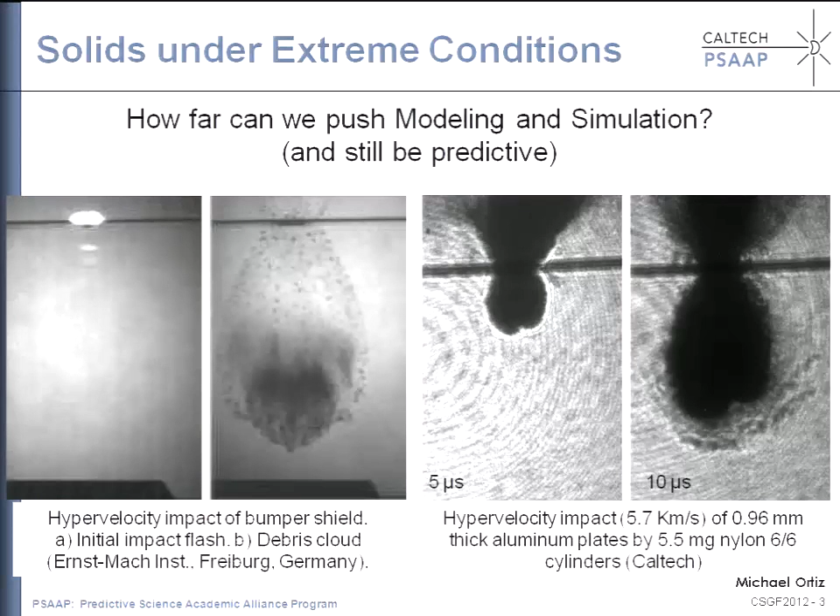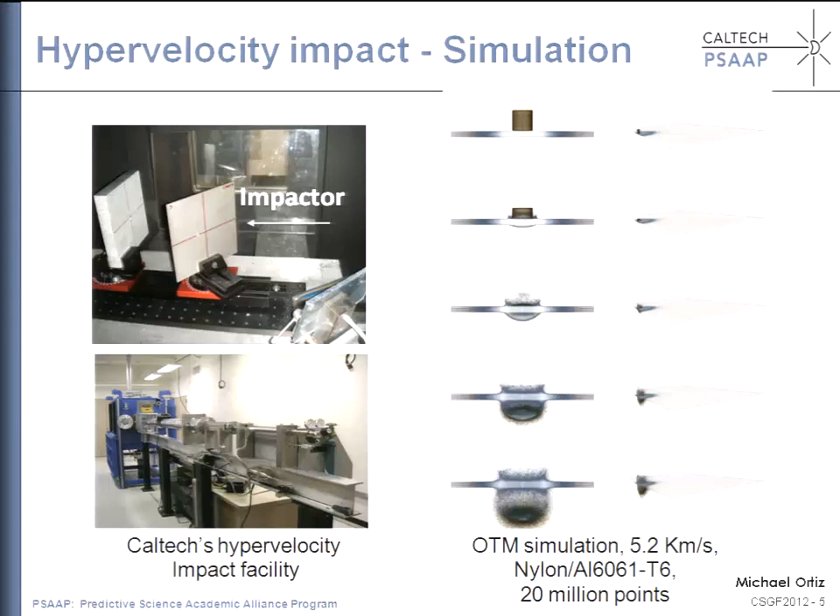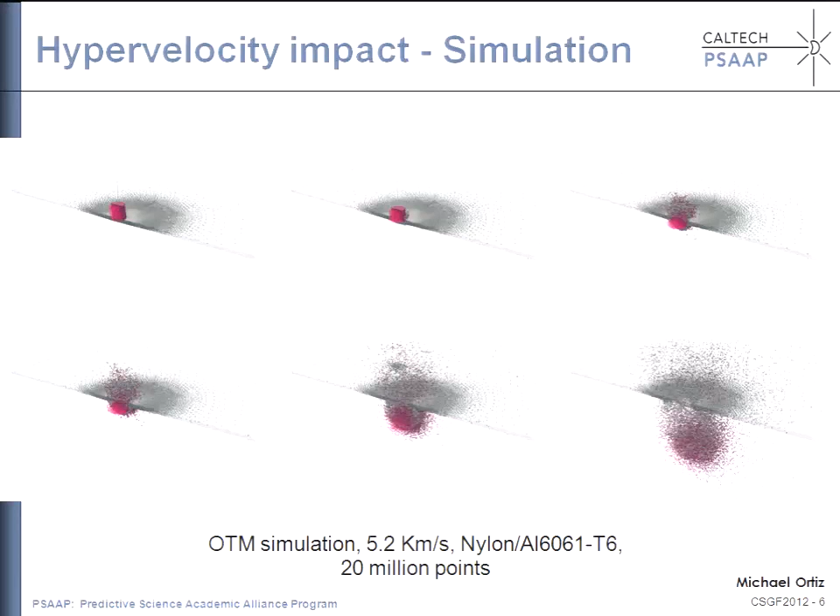Okay, so if we look at the anatomy of one of these simulations, you can see, of course, that a lot goes on. You have impact, you have complex material behavior, very high pressures, very high temperatures, very high strain rates. So the anatomy of a typical computational campaign is as follows. So you can think of it as consisting of several layers. Okay, so at the top layer, what we do is, of course, we don't do just one calculation, but we actually do thousands of calculations. Okay, what we call ensembles of calculations. And the objective is to garner statistics.

So the systems we are simulating are to some extent random. They can have random inputs, or they can become chaotic, for instance, fracture and fragmentation. Okay, and then the question is how well can you pin down the behavior of the system and what is the level of uncertainty in your predictions. And for that, it's not enough just to send one calculation, but you have to do literally thousands of them, actually statistical sampling. And at this level, the purpose of the uncertainty quantification campaign, as it's called, is to, as I was saying, garner statistics and determine design margins and also levels of uncertainty. Okay, so that's very typical of the way we conduct calculations these days.

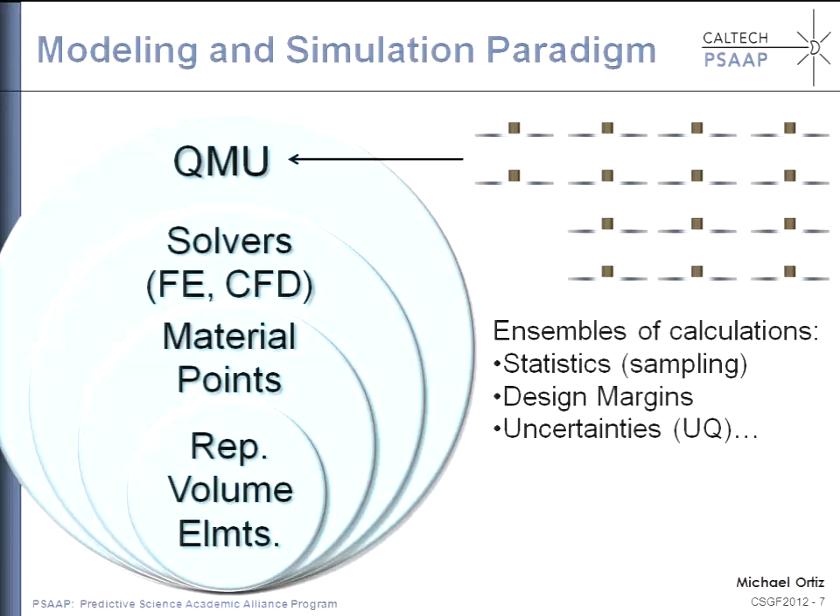It's not just doing one hero calculation, but actually literally doing thousands of them, and quantifying uncertainties. At the next level, you peel off the QMU layer, and you're looking at doing individual calculations. So here's where you have to contend with the global geometry of the system you're simulating, maybe a CAD model.

You have to worry about boundary conditions, initial conditions, for instance, impact velocity of the impactor, the thickness of the plate. So these are all things that are passed into the solver, and the solvers are supposed to bundle all this information and move it forward in time. So this layer, the layer of the solvers, of course, is very sensitive to the details of the simulation, to the geometry, to the boundary conditions, to the initial conditions.

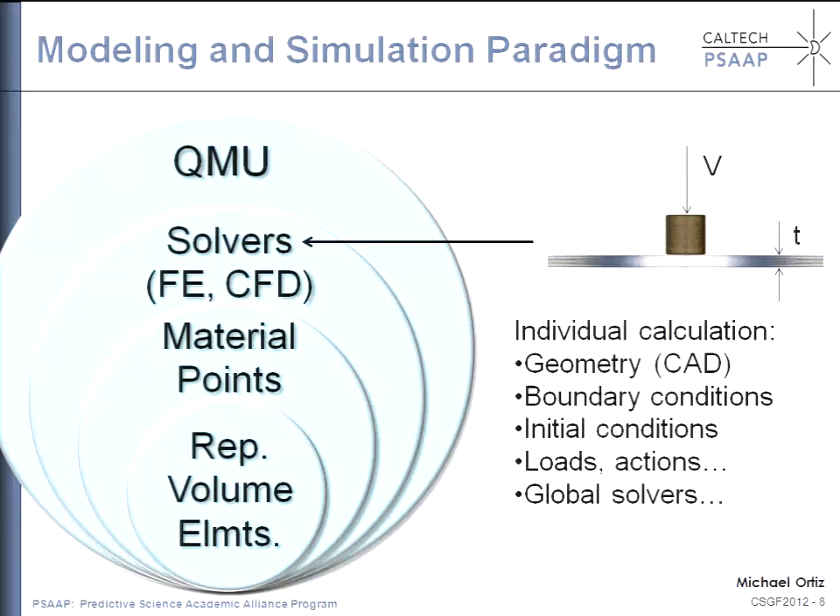However, if you move down one level, then you're looking at individual material points, and these represent local material elements. So these are small bits of material that only see local conditions of deformation and temperature, and they're completely insulated from the geometry of the system. So once you come down to the level of an individual material point, you have lost sight of the particular geometry that you're simulating, you've lost sight of the particular boundary conditions, and you're looking specifically at material behavior, the behavior of small samples of material.

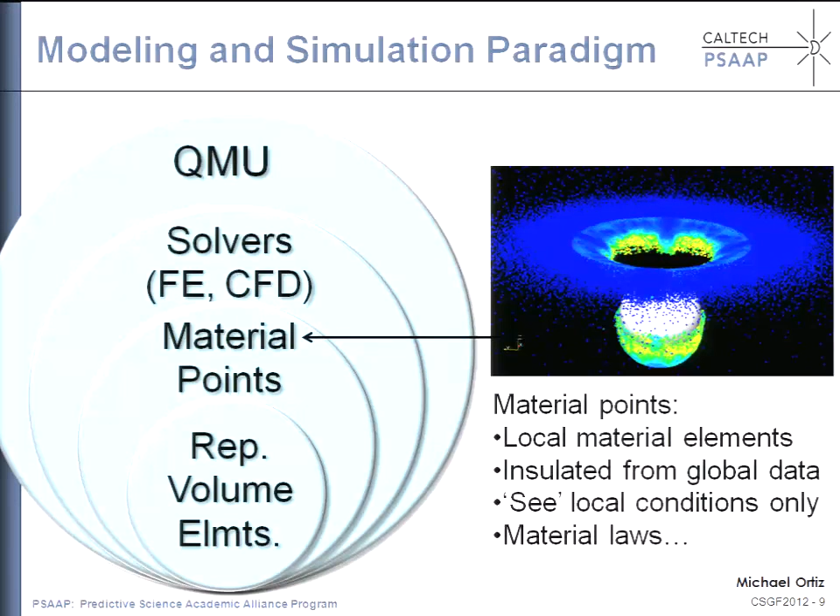And that behavior is driven by local conditions and takes the form of material laws, constitutive laws, what have you. And if you keep looking down in length scales, you find that material points are not just blobs, but they have a lot of structure themselves. So you start looking under the microscope, perhaps, and you see that an individual material point is not at all a point, but may have a polycrystalline structure. So it really represents what is known as a representative volume.

If you keep looking down, maybe in each one of the crystals you begin to see individual defects, such as dislocations. You keep looking down, you start seeing individual atoms, and now you're at the level of quantum mechanics. So it is this hierarchical point of view that perhaps describes best the anatomy of a modern computational campaign. And what I would like to focus on today is the description of the material at this level. No matter what you do, the flow of information of a typical calculation will always take you at some point to the level of individual material points. And there the question is, can you describe that behavior?

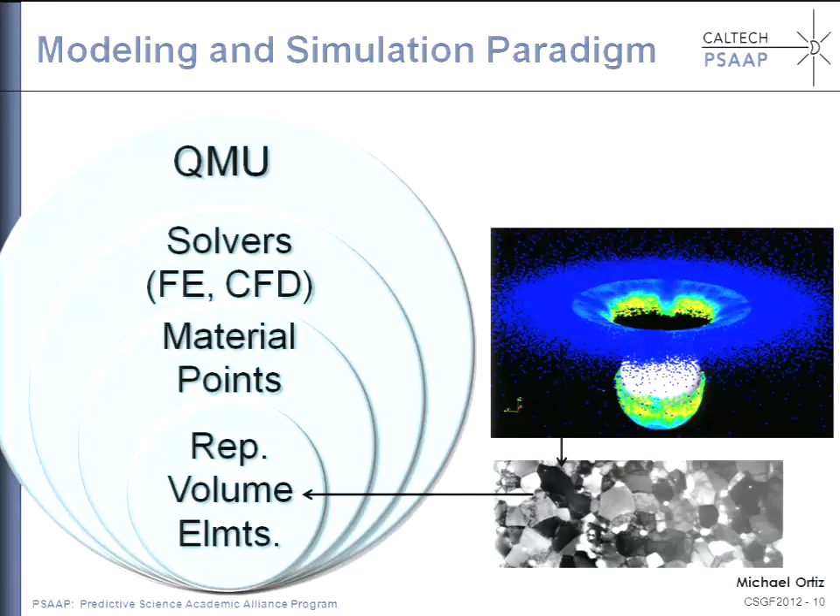So that sets the boundary conditions. And so this is a summary more or less of what I said. The material points, material models really sit at the core of full system simulation. The flow will always take you to a material point, and you'll have at some point the need to describe the behavior of those material points. And that behavior is purely physics or chemistry. So at this point, you're completely insulated from the details of the global geometry, boundary conditions, and so on, and you're just facing physics-based modeling.

The other thing to be pointed out here is that, because material models really are the core of the simulations, they're really predictive bottlenecks. No matter how good a job you do at spatial resolution, at temporal resolution, you can refine the resolution of your global system as much as you want. If your material description is no good, your global simulation will also be no good. So your simulations are only as good as your material models and never better. You really need to give them a lot of attention, make them really predictive if you want to have any chance at being globally predictive.

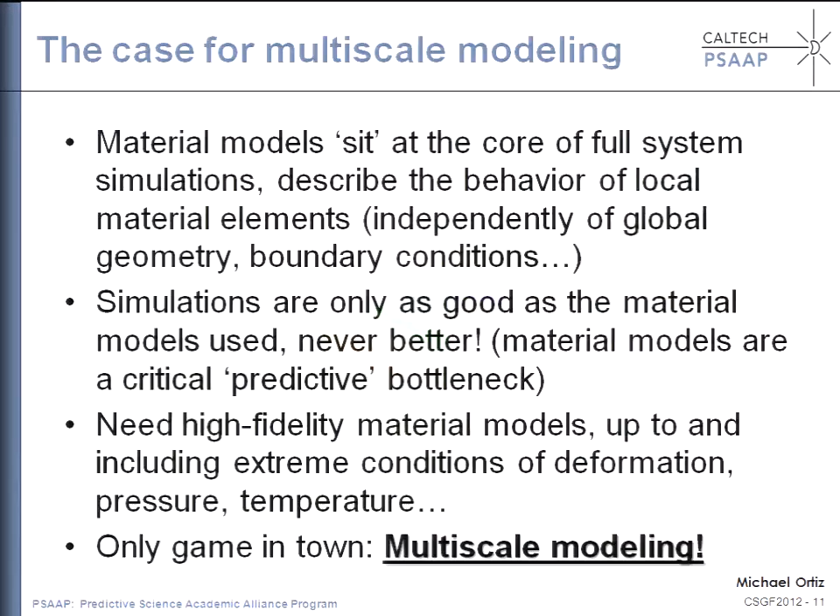And the physics is multiscale. So really the only game in town in terms of developing high fidelity material models is multiscale modeling. So what is involved in multiscale modeling? As I was saying, the reason that you need multiscale modeling is the physics of materials is really multiscale.

Say, for instance, you're trying to characterize the strength of materials. How do materials deform at high levels of stress and temperature and strain rate, for instance? Your global simulation may be at this level, so now you start looking down length scales and time scales. In a typical metal, you begin to see the polycrystalline structure. So you see that these material points are not points at all, but themselves have quite a bit of structure.

The first level you encounter at the SEM level, you begin to see the polycrystalline structure. Then if you look within individual grains, you find that the behavior of each one of these grains is far from being homogeneous. Typically you develop very fine subgrain structures that I'll come back to in a second. Then if you keep looking down in the length scales and time scales, you begin to see individual defects, so dislocations, vacancies, and so on.

Of course these are mediated very directly by the atomistic structure of the material, but still are at a continuum length scale. So maybe the scale of microns or hundreds of nanometers are still within the purview of continuum models. And then if you look at individual defects, here you see the atomistic structure of matter, and you may see the core structure of each one of these dislocations, which, as you know, are line defects in crystals.

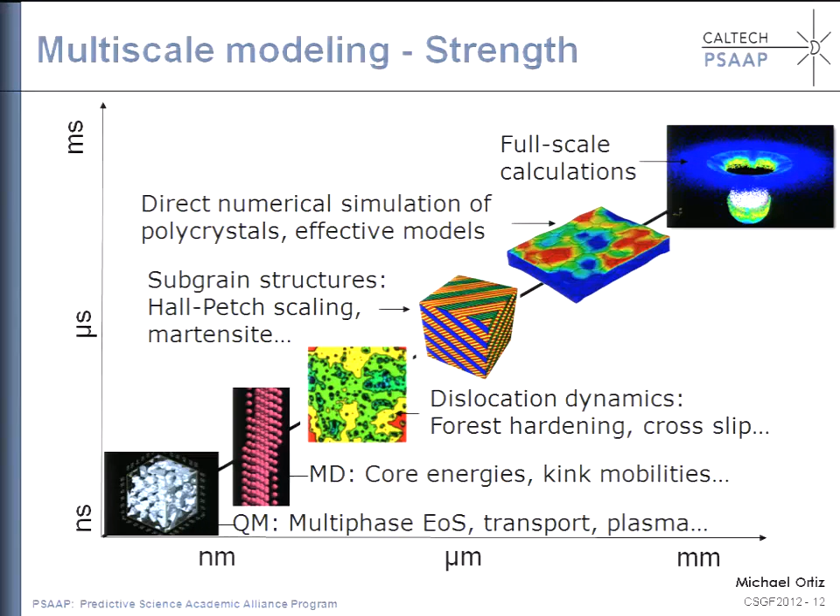So what is the big deal? Why don't we just go ahead and do it? Of course, multiscale modeling is much more easily said than done. So the question is, how do you actually do it in practice in a way that you can use the models in actual calculations, with some actual computational capability?

The essential difficulty is that there are many vastly disparate scales. You start at the atomistic level with quantum mechanics, and between that and your engineering application there could be maybe 10 orders of magnitude in length scales and also in time scales. So quantum mechanics will never do. There's a lot that happens between quantum mechanics and your engineering applications that determines the macroscopic behavior of materials, and somehow has to be modeled in some systematic way.

Whereas there are some processes that happen at the atomistic level, they're rate limiting: lattice defects, transport, and so on. The macroscopic processes of interest, maybe ductile fracture or irradiation damage or aging of materials, may happen at length scales that are completely macroscopic. And there's a huge gap in between.

Also in terms of time scales, if you're doing a molecular dynamics calculation, a typical time scale will be maybe a femtosecond. You may be interested in aging of materials. That happens over years. So again, a huge gap in time scales that you have to fill in if you want to model aging in a multiscale fashion. Also the spatial scale gap: you have to go from angstroms to maybe millimeters and meters.

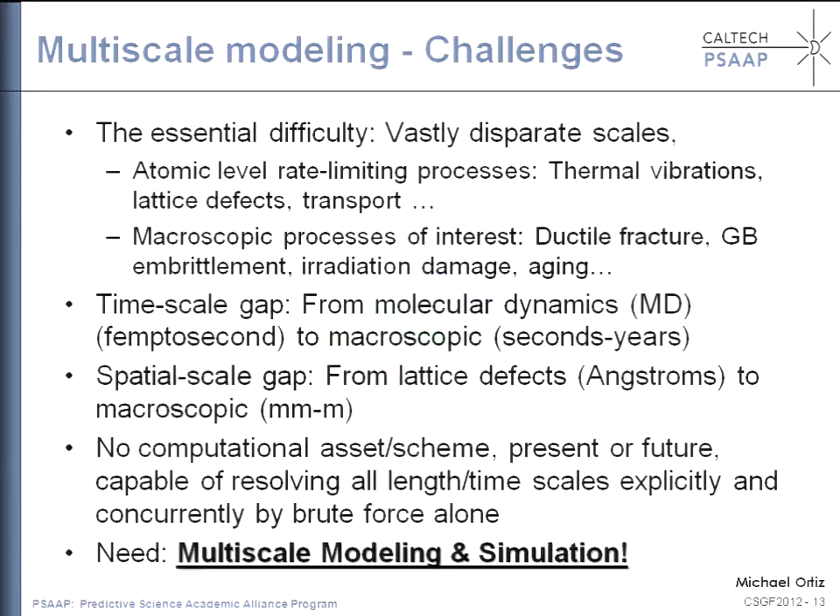But as it turns out, there is still room and a need for being clever, and the cleverness really comes in multiscale modeling and simulations. How do we actually do it, provided that we cannot just do it by brute force? So now I'm going to fill in some details as to how you can actually bridge length scales in a practical way, so that at the end of the day you have models of effective behavior that you can actually use in simulations.

So say you're Galileo Galilei and you're pondering the cutting edge question of the time, which is how do you model beam bending. Most beams at the time were made of wood. And of course, it's clear that wood has a lot of microstructure, so it's composed of cells. The cells maybe could be in the millimeter scale or sub-millimeter scale, whereas a typical beam could be several meters in length or in span. So clearly you have a multi-scale problem here.

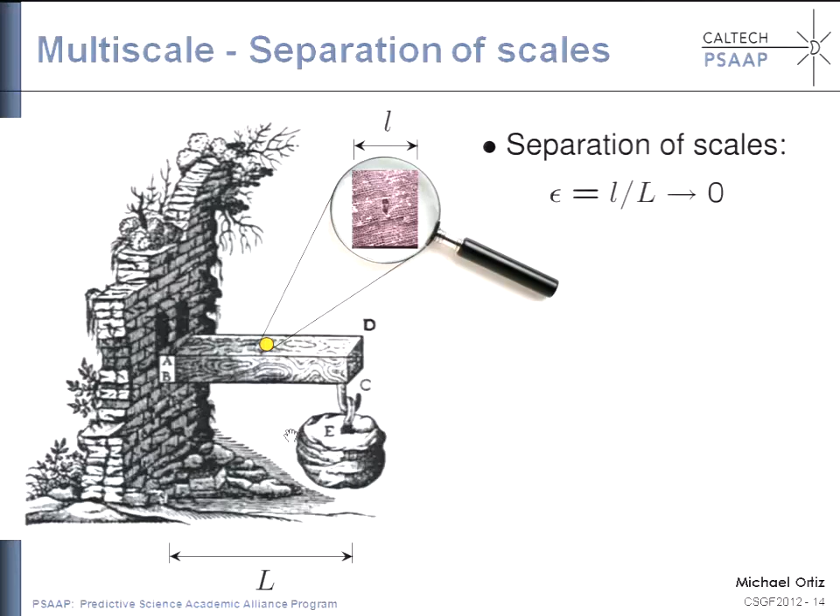So if you're Galileo Galilei, what do you do? You say, well, okay, fine. This is a multi-scale problem, but there is strict separation of scales. The length scale that I'm interested in is much, much larger than the length scale of the microstructure. So it turns out that under these conditions, if you have strict separation of scales, then you can do clever things.

And of course, very often you're interested in the engineering application, so you want to know just what is the macroscopic behavior of your system, and you don't really care so much what happens at the individual cell level. You may have millions and millions of cells. You don't really care so much what happens in cell 500,002. You really are interested in the macroscopic behavior. So some way we would like to get rid of the microscale and come up with an effective model that we can use in simulations where the microscale has already been eliminated and it's taken into account in some effective way.

However, you may still wish to have a return option. So what does that mean? Very often you're not just interested in macroscopic averages, but you may be interested also in knowing what happens at the microscale, so also at the individual cell. For instance, suppose that you're interested in the failure of the beam. We know that that would be mediated by processes that happen at individual cells, cell crushing, cell shearing, things like that. So in some conditions, you may wish this return option.

So you want to have an effective theory that allows you to go back if you need to and query the conditions that happen at the microscale. Those may be important especially if you're interested not just in average behavior, but in the extremes of the fields, because maybe those are the ones that are important for failure processes or some other processes. And I'll show you an example later on where this return option is really important. So this is the objective.

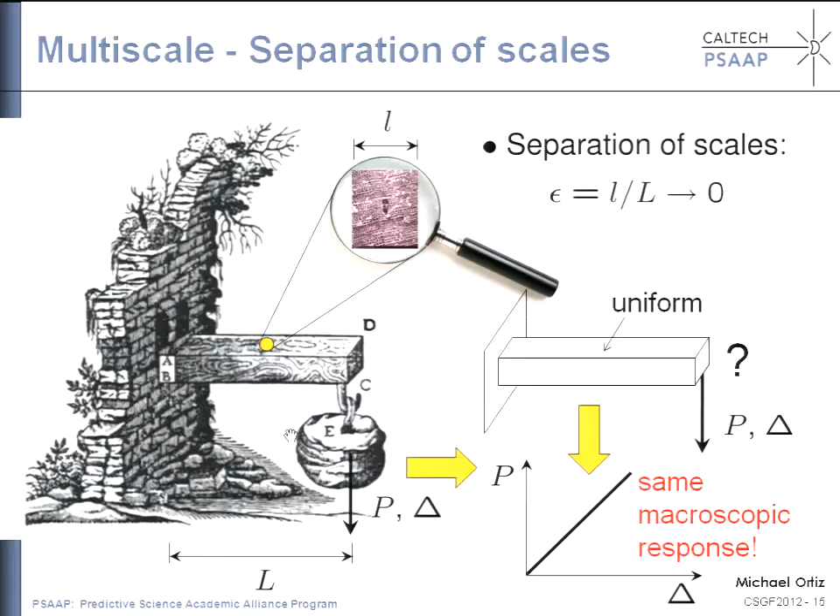There are many cases where the microstructure happens as a result of deformation. So initially, the material is uniform. You deform it somehow, and in response to that deformation, the material develops microstructures. In this case, of course, it's a bit more difficult because you don't know to begin with what the microstructure is. You have to predict what the microstructure is, okay?

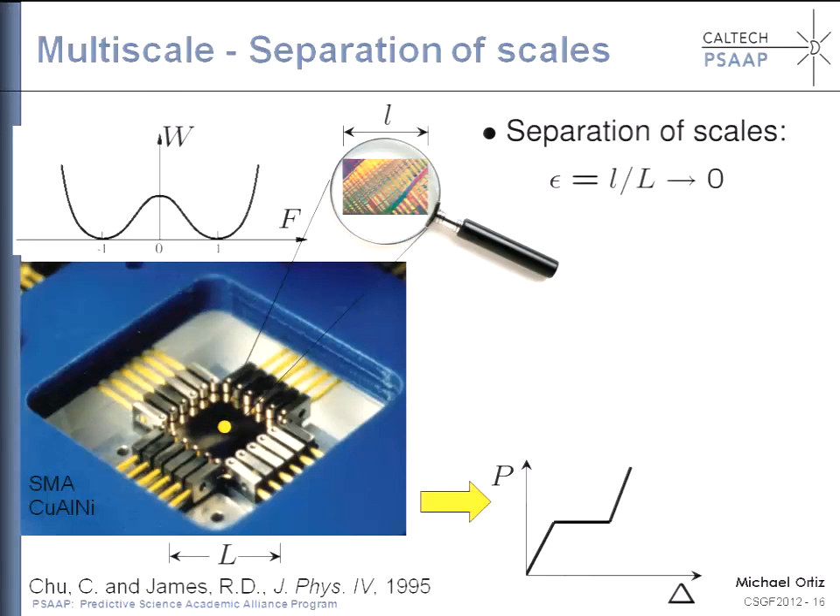And in this case, the objective would be to develop an effective model that you can use at the macroscale that somehow has eliminated, again, the microstructure, but that gives you a macroscopic response that is indistinguishable from the original system. And these kind of situations perhaps are more generic in the sense that you don't know what the microstructure is beforehand. It's part of your prediction.

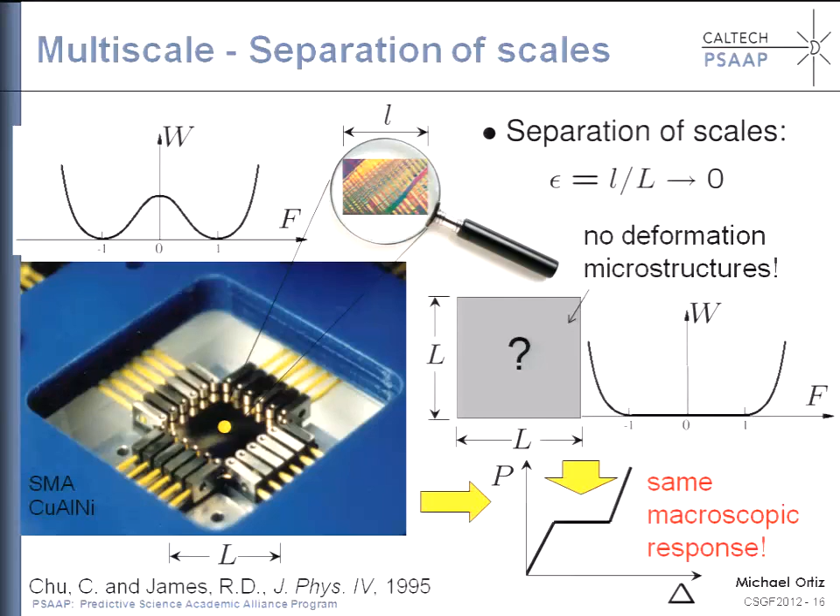Okay, so fine, but how do you do it? Of course there are many methods that have been developed, some of them going back to the 19th century. Statistical mechanics was really intended to be a multiscale method, where you go from thermal vibrations to macroscopic equations of state. So there are many methods for bridging length scales. Some of them are better than others. So let me give you an example just to convey the flavor.

There are some situations where the behavior of materials is governed by energy minimization. Basically, there is some energy functional, and the material will develop microstructure in such a way as to minimize its energy. In this case, there is a standard theory called the calculus of variations that provides a recipe, basically a crank that you have to turn, that at the end of the day will give you the effective behavior of the material. And physically or intuitively, the scheme is very clear.

You may have a macroscopic application. I've chosen one at random, say deep drawing here of a cup. At this level you want to have an effective description of the material. You don't want to contend with microstructure. What you have to do is consider what are known as representative volumes, so small volumes of material. And within each one of these representative volumes, somehow you have to pre-evaluate all the possible microstructures that will occur.

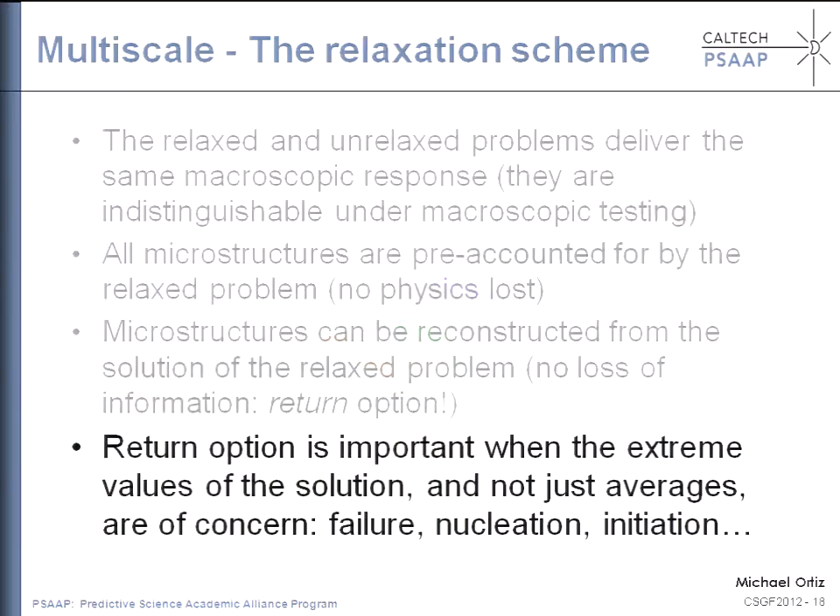As I was saying, this return option is important when the extreme values of the solution and not just averages are of some concern, because of failure, because you're interested in nucleation, initiation, or some other reason. Okay. So let me give you an example where this kind of scheme actually is essential in the sense that, as far as I know at least, there would be no way of doing these kinds of simulations without multiscale modeling of this particular type.

The particular application concerns the detonation of high explosives. In particular, what one wishes to understand is initiation sensitivity. So what is initiation sensitive to? The standard picture there is that, again, this is a multiscale problem in the sense that these HE materials have a grain structure, and then molecular dynamics simulations and also direct observation show that at the subgrain level, the material develops microstructure. When you look at individual grains, you find that the deformation is far from uniform, but it can localize along very narrow shear bands.

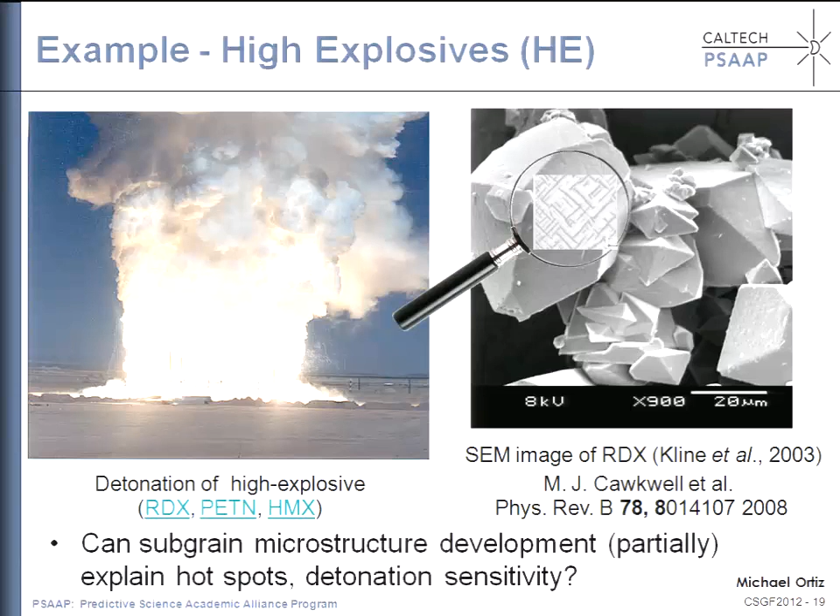Those shear bands actually deform much more than the average deformation of the material. You develop very high pressures there, very high temperatures, so you have hot spots. And initiation, of course, is all about developing hot spots. It's no longer just about average conditions in the grain, but the extremes of the distribution. So here's how we do these kinds of calculations in a multiscale fashion. This is the flow of information, and you can think of this as an information boomerang, okay? Again, it's not just upscaling, but upscaling followed by downscaling.

You start from some basic material properties that perhaps you compute using atomistic simulation or even quantum mechanical simulations. Here, these materials are molecular crystals. There is rather little information about the behavior of these materials, for instance, the plasticity of these materials, the strength of these materials. So we filled in those gaps doing ab initio first principles calculations. When I say we, I really mean my colleague Bill Goddard and his group. There are a number of basic properties that we computed this way, and we used them to populate the single crystal plasticity model that operates at the single crystal level.

This is supposed to be a material point, a representative material volume, that in a macroscopic simulation would sit somewhere within the mesh. And these are the typical microstructures, the optimal microstructures that give you the effective behavior of the material. These are called sequential laminates. You can show mathematically that it is precisely these microstructures that give the softest possible response of the material. So these are the optimal microstructures. And we can generate them analytically in closed form, and we can get the effective behavior analytically in closed form. That's great news. Anytime you can avoid doing calculations, that's great, because having solutions analytically in closed form really saves you huge amounts of calculation.

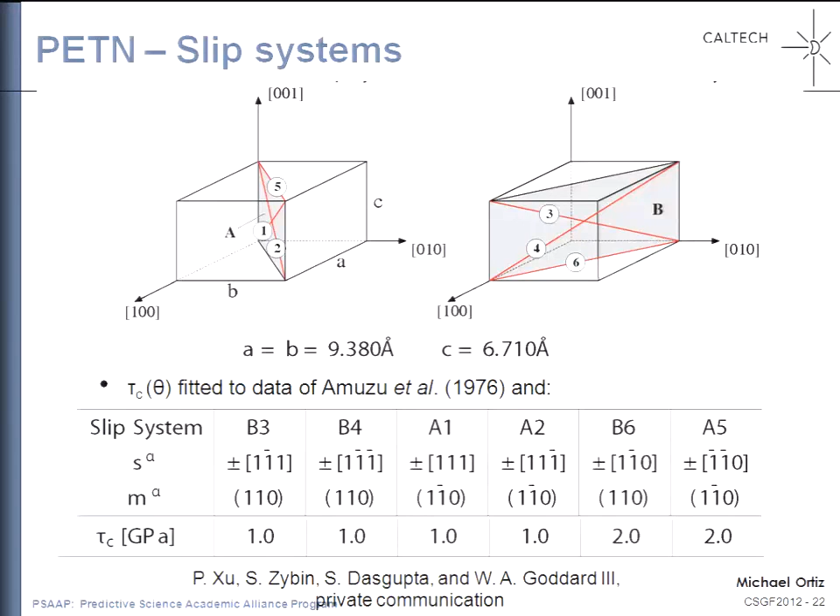As we were saying, there is very little that is known about these molecular crystals, for instance, PETN. What are the active slip systems? What are the yield stresses for the activation of plasticity? Those are, for the most part, unknown, and were computed from quantum mechanical simulations. At that point, we are in a position where we have a baseline model at this level. We can unleash the microstructural calculations and then compute effective behavior and use it at this level.

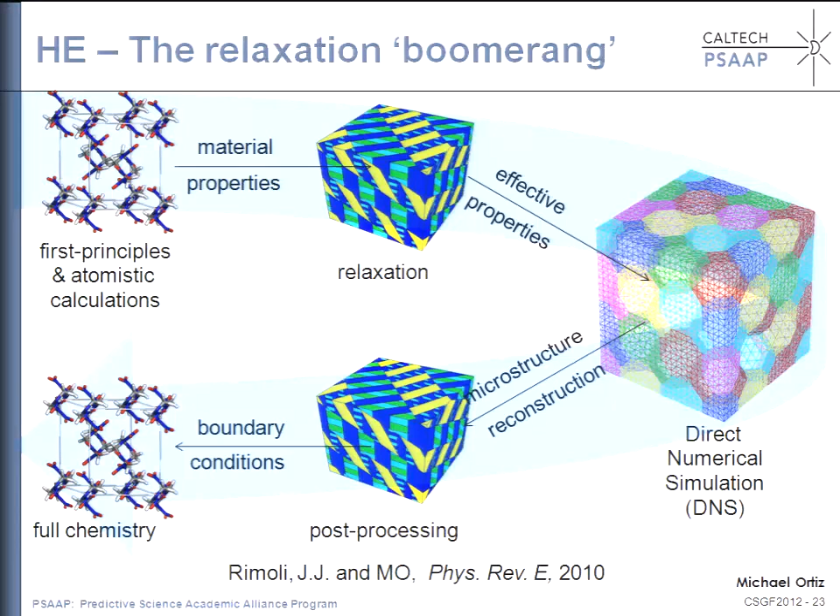So then we can go back at the post-processing stage, generate microstructures of interest, and then pass boundary conditions to our colleagues. Typically, the microstructures that you find are microstructures where you have extreme concentration of deformation at some points. So these are the hot spots. It turns out that the time scales in the development of these hot spots are of a microsecond.

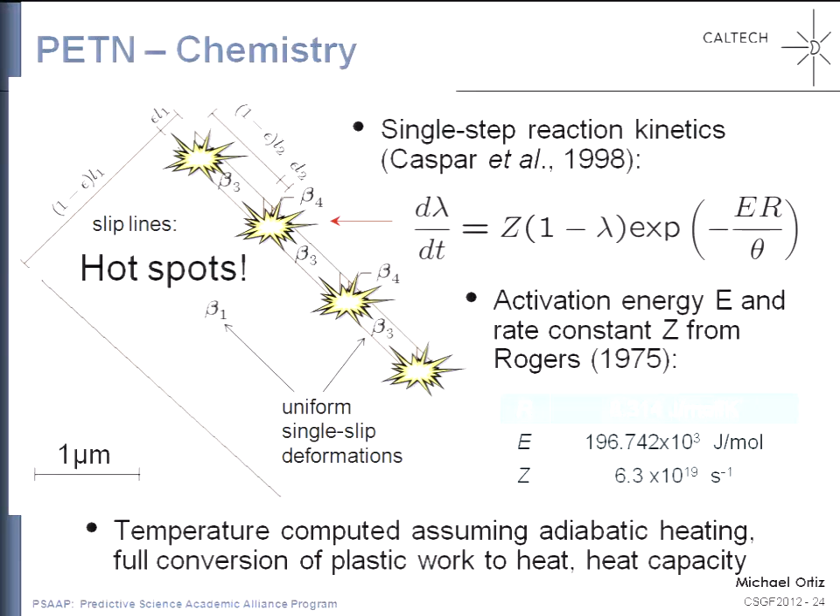So if you go to somebody like Bill Goddard and say, please do a quantum mechanical calculation over a time span of microseconds, he'll say it's absolutely impossible. So just to demonstrate the connection with chemistry, we used a very simple single-step reaction kinetics as a placeholder to full-scale quantum mechanical chemistry calculations. And so then we tried to make contact with engineering testing.

So very often these materials are tested in a plate impact configuration. So you have a plate of PETN, and you have a flyer plate that is sent against the specimen maybe at 1,000 meters per second. So that induces a shock that goes through the thickness of the plate, and in some cases induces detonation or initiation. In some cases, it does not. So of course, the predictive challenge here is to determine when you have initiation and when you don't.

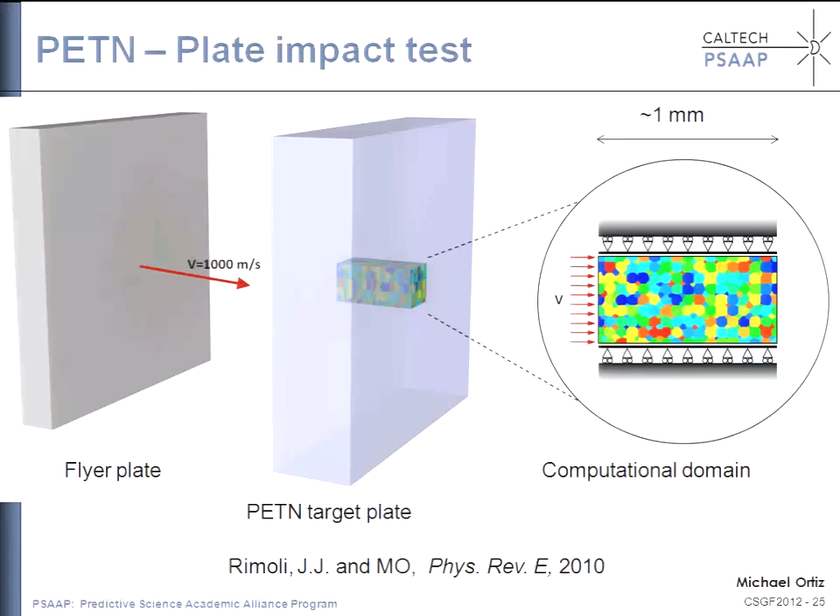And so the way we do the simulations in this case is we just take a core of material through the thickness, and we apply periodic boundary conditions around the perimeter of the core, and then this would be the computational domain. So it turns out that these days we have enough computational power that you can resolve the polycrystalline structure of the material explicitly. So here's where you can use brute force.

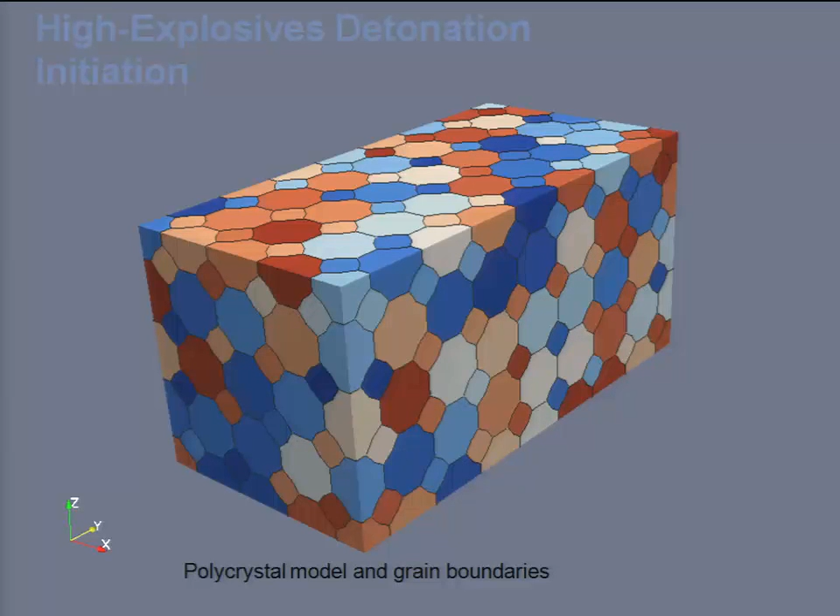In the old days, there were people that spent entire careers trying to characterize the effective behavior of polycrystals. So these days, at least this is a case where we don't have to be clever. We have enough computational power that we can actually resolve explicitly the polycrystalline structure, and we do. So this is a typical mesh that we would do in the calculations. So this is a typical simulation.

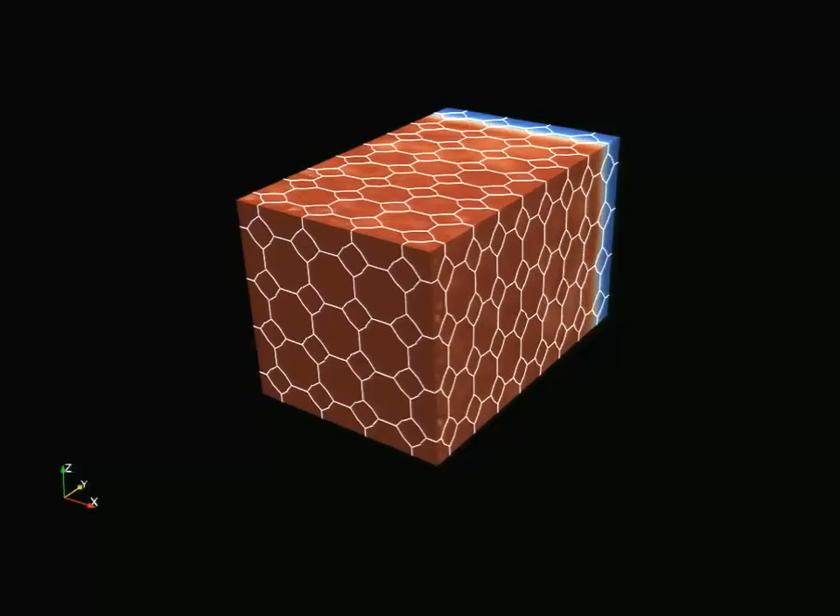So what you're seeing here is the effective model being exercised. What this effective model is giving you are average conditions. Not peaks, but average conditions. So you see some fluctuations here in velocity in this case, and those fluctuations are due to the polycrystalline structure. So there are some fluctuations, but definitely not hot spots, something you could call hot spot and could be responsible for initiation. So again, this is a map of temperature. You see some fluctuations, but again, very mild fluctuations just due to the polycrystalline structure.

And what I'm showing here is that I've taken two material points at random, and I'm showing the evolution of the microstructure, predicted by the microstructure model, at each one of those material points. Of course, there are thousands or perhaps millions of these material points, and this is just a sampler. And what you see is that at individual material points, you develop very fine microstructures, where there are regions that are very highly deformed, that attain very high temperatures and conditions that are, in fact, highly in excess of the macroscopic averages.

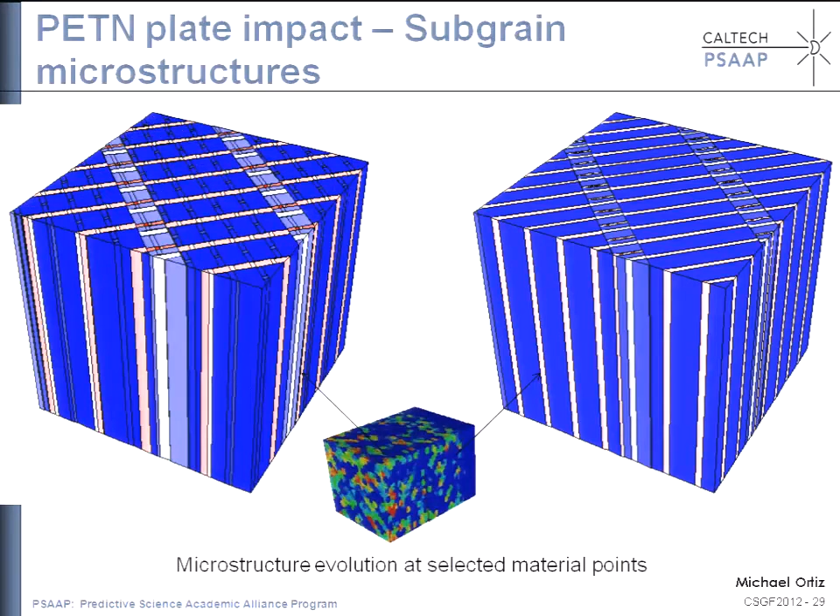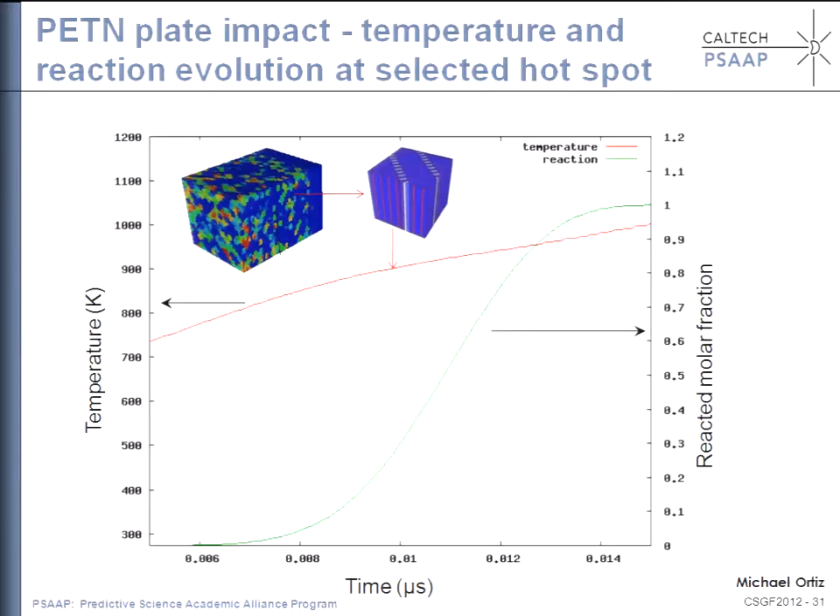So whereas the macroscopic average doesn't really give you any useful information regarding hotspots, the microstructural model gives you at least some handle or some information about extreme values in the distribution of pressure, deformation, and temperature, and then you collect some hot spot statistics, which is what I'm showing here. So this is the evolution of a typical hotspot, how the temperature rises. This is the molar fraction of a reacted product, showing, in this case, full initiation.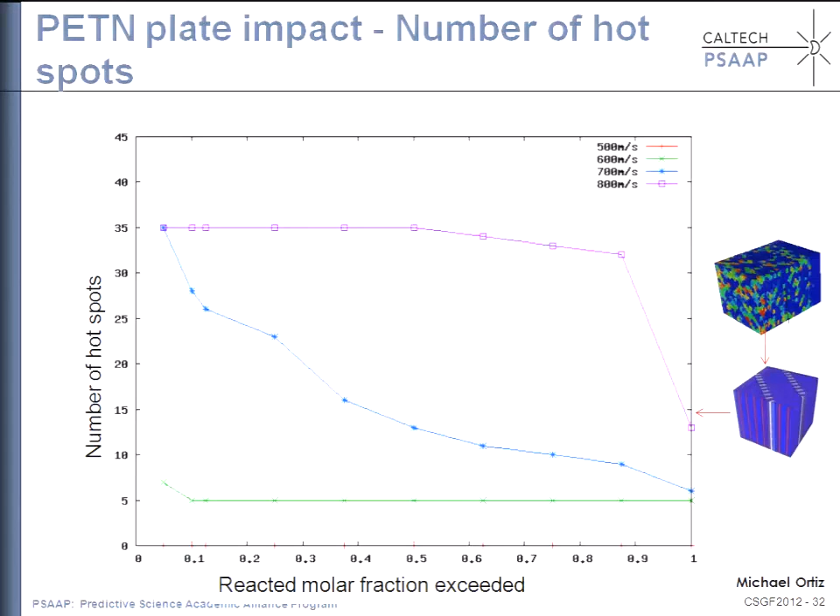And the payoff at the end of the day, why this is interesting, is because now you're not just confined to quantum mechanics, but you actually can make contact with engineering testing. The vast majority of tests that are done for these materials are done at the engineering level. So drop weight towers, things that definitely happen at the macro scale. And to make contact with these test data, and that's ultimately what you want to do to assess predictiveness, you have to make contact with test data.

To make contact with engineering test data, you really have to go all the way to the macro scale. And so these are some typical results from tests that would be conducted, for instance, at Los Alamos. And typically what they do is they plot in a logarithmic scale, this is what is known as a Pop plot, the impact pressure versus the distance to detonation, and they find that there is this power law relation.

So with the macroscale model, because we have control on hot spots, we can produce more or less the same plot and exhibit also power scaling of some type. So from the model that we use, we get an exponent which is 2.9, whereas for PETN, you get exponents in the lab that are perhaps 2.5. So there's still a little bit of a gap.

You can see that the model perhaps is not exactly predictive, but at least you're in a position where you can assess the predictiveness of the model. So this is basically the best that we can do at this point. So we know that if that's not good enough, then you can go back and refine the model. But at least we have a way to make contact with testing and assess predictiveness.

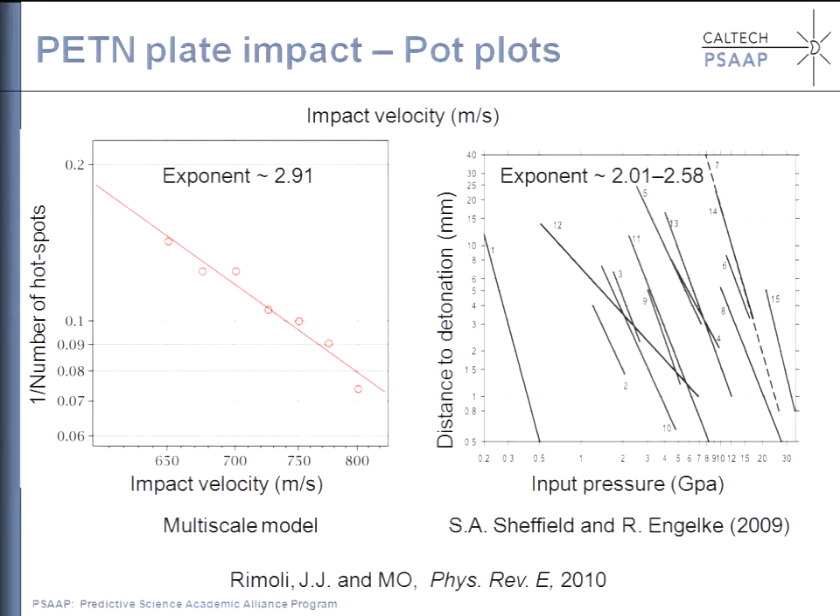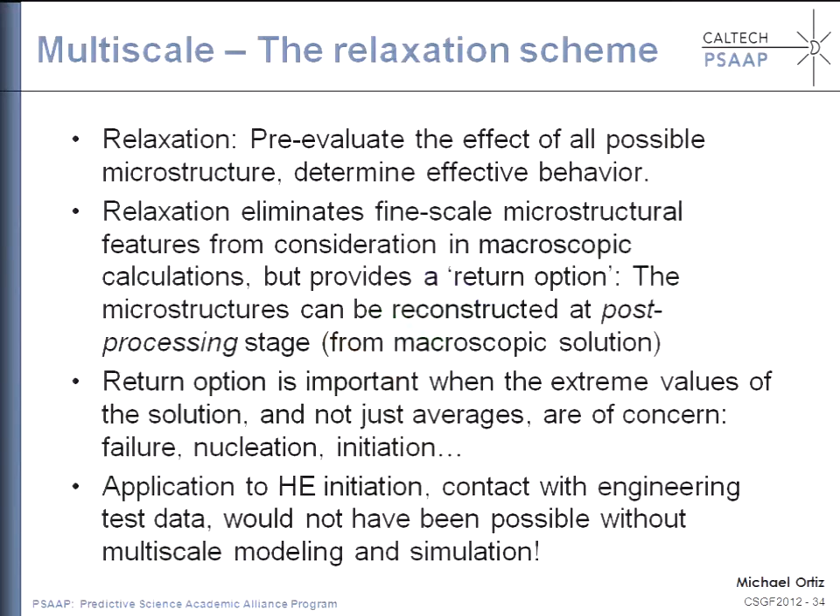So this is just a summary of this kind of methodology. So in a way, you can think of this as an optimal way of doing upscaling where there is no loss of information, and therefore you can always go back. And the application to HE, and specifically taking the simulation all the way to the engineering level, I think could only really be done this way.

Now, just to give a counterpoint to this, so not to give you the impression that somehow these relaxation methods are the panacea and solve all multiscale models, let me give you a counterexample of a case that is not amenable to relaxation, the kind of upscaling that I described earlier. So it's also a multiscale situation. It has to do with fracture and fragmentation.

And here, the multiscale hierarchy that you find is that the ductile fracture of the material is ultimately the net effect of the formation of voids and the coalescence of voids. So if you look at it again as a multiscale problem, here at the top level, you have the formation of a ductile crack that causes the failure of the material. If you start looking down, you see individual voids that grow under the action, for instance, of hydrostatic pressure. Then these voids somehow nucleate at some point at the nanoscale by emission of dislocations.

So that would be the nucleation event. So perhaps the nucleation sites are second phase particles, for instance, in steels or something that is pre-existing, or under extreme conditions, the nucleation sites can maybe be generated by vacancy aggregation. And then at some point, you need to understand, therefore, the properties of vacancies.

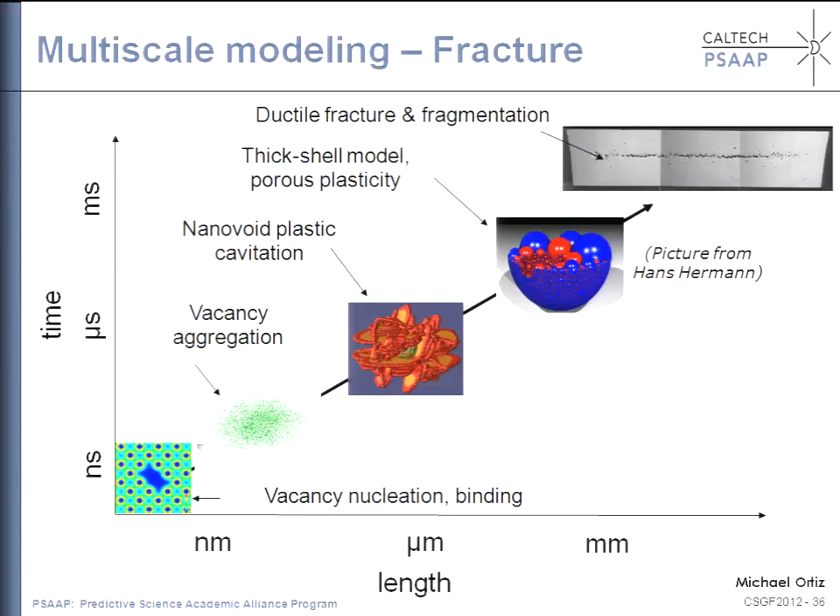So specifically, this step where you go from distributed damage to localized damage is something that is not amenable to the kind of upscaling that I described earlier. So this is what I said: void nucleation, growth and coalescence. And fracture provides an example of a multiscale situation where, because the damage becomes localized to a plane, it's no longer just a representative volume kind of situation.

It's not about volumetric averaging, but to get at the fracture properties of the material, you have to allow for localization of damage to individual fracture planes, what are known as void sheets. So here the relaxation scheme would completely break down and would give you something completely useless. Here we're not in the market for constitutive models or equations of state. What we want is really fracture properties, which is a completely different type of physics.

There are other methods that you can use. Of course, that would be another lecture. These are called optimal scaling methods. So those give you optimal bounds of the fracture energy, for instance, as a function of fundamental properties of the material, such as surface energy, hardening properties, and so on.

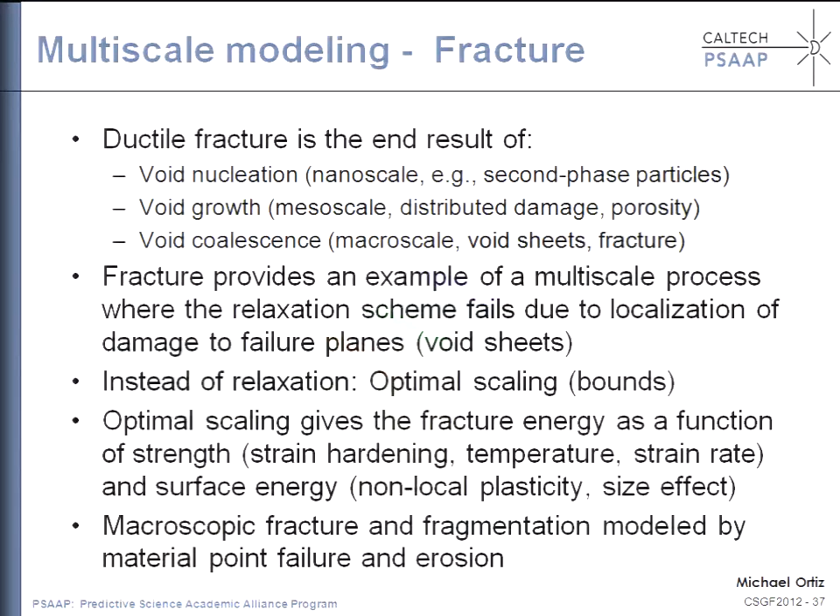So there are methods that you can use that actually give you the effective fracture properties you want at the end of the day. But it's, as I was saying, a counterpoint to relaxation methods. And the point is that there is not a panacea. There is not a single method that will give you all effective behaviors of interest. You really have different types of behaviors that require different methodologies.

So just to give you an example of the kind of predictive capability that we can get in the area of fracture. This is a very nice set of tests that were run at Lawrence Livermore by Jeff Campbell and co-workers. What they did, they took a spherical shell made of steel, and they blew it up. They detonated some high energy material here on one side of the shell, and of course the detonation causes the shell to break up and undergo fragmentation, in fact, fine fragmentation.

And the nice thing is that they showed a lot of pictures of how the process takes place, and they also collected fragments. So they were able to recover fragments and provide statistics of, for instance, fragment sizes. So again, you have a data set that you can compare against to assess predictiveness.

So here you have some simulations that we do at the center of this particular type of test. These are supposed to replicate the Campbell et al. test. So you have, again, a spherical shell, and in this case, we just apply a simple drive that models somehow the detonation. You can see here the formation of very fine fragments.

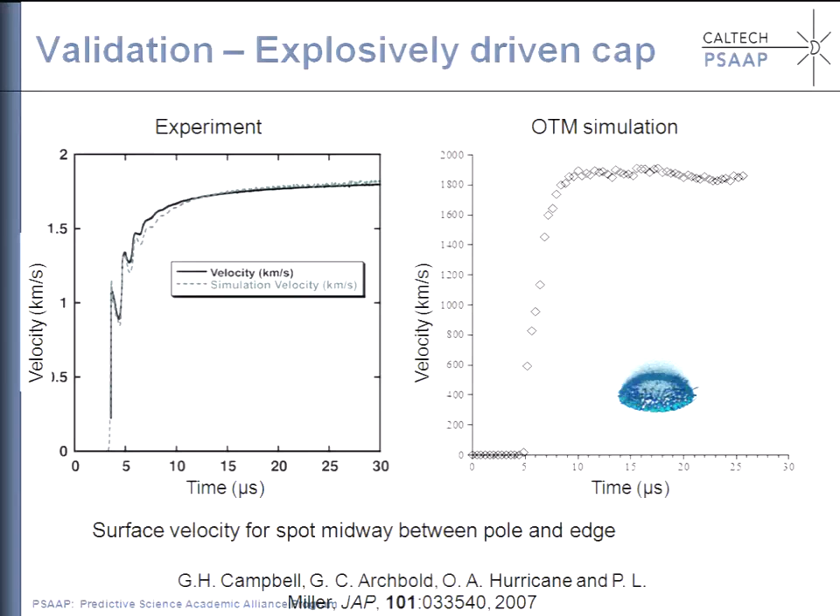So you have now measurements you can compare against. This is the experiment, the velocity at some point in the shell versus time. This is what you get from the simulation. So it's not entirely perfect, but considering that we didn't simulate the drive exactly, we are, I think, in the ballpark. And these are the fragments recovered from the simulation.

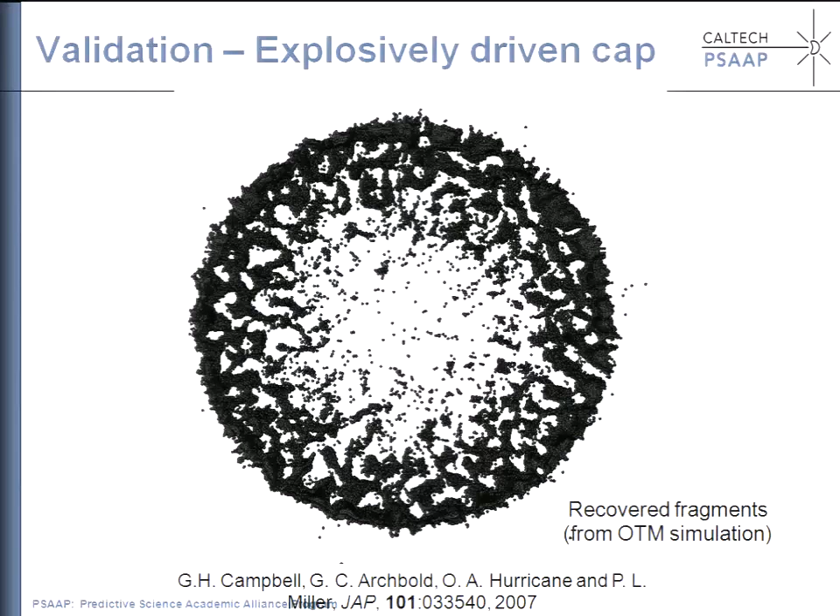So at the end of the simulation, we went around, we looked for the fragments that are in excess of a certain size. We put them back together, so these are the recovered fragments, not from the experiment, but actually from the simulation. And so now we can put together histograms of fragment size, and again compare with the ones that were measured experimentally.

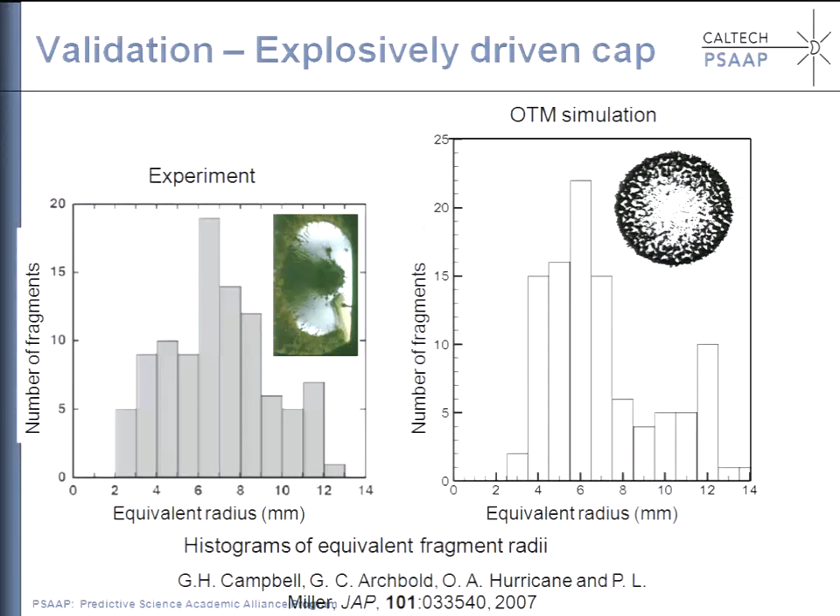I really have no idea why there are 2 peaks, and why we actually get 2 peaks. Maybe it's just a complete fluke, but okay, you count your blessings. And generally, perhaps the key point is that we can make contact with engineering testing, macroscopic test data, in this case, from the experiment of Campbell et al.

And material models are a critical predictive bottleneck. If you want to be predictive, you have to do a good job at modeling and simulating material behavior. So there is a need for high fidelity material models. Brute force won't do, so the only game in town is multiscale modeling.